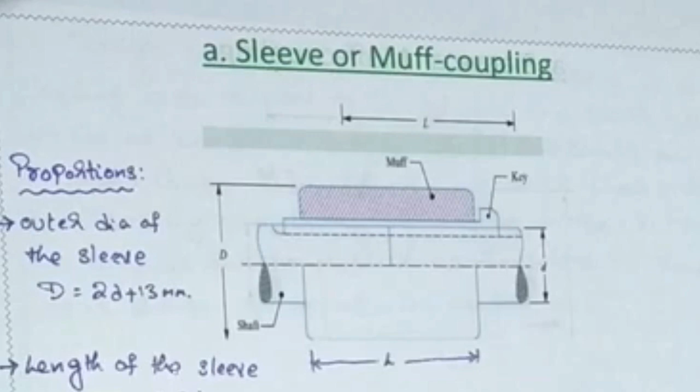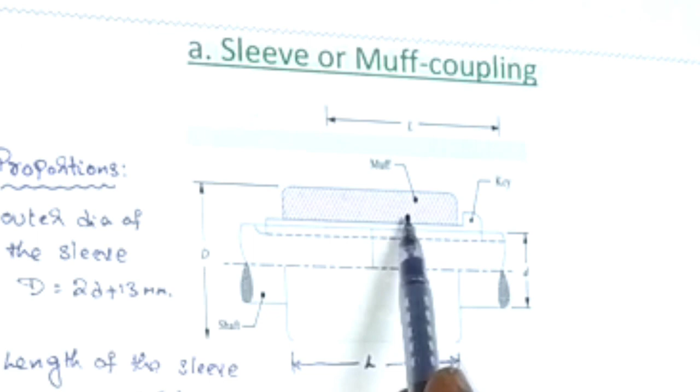Hello everyone. Today I would like to discuss sleeve or muff coupling. Here this is the diagram of sleeve, this is called muff or sleeve. In this, major two parts are there: first is the design part, second is the verification part.

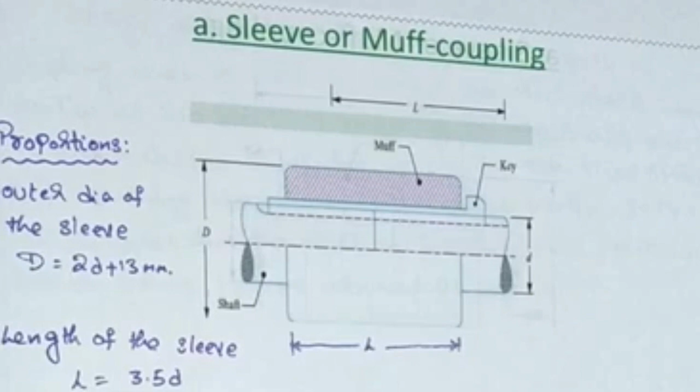In design part we have to design shaft, sleeve and key. After design part is over, we have to check the stresses induced in the key is less than or equal to given allowable stresses. If the values are less than or equal to the given values, the key design is safe. The sleeve coupling is the simplest type of rigid coupling made up of cast iron.

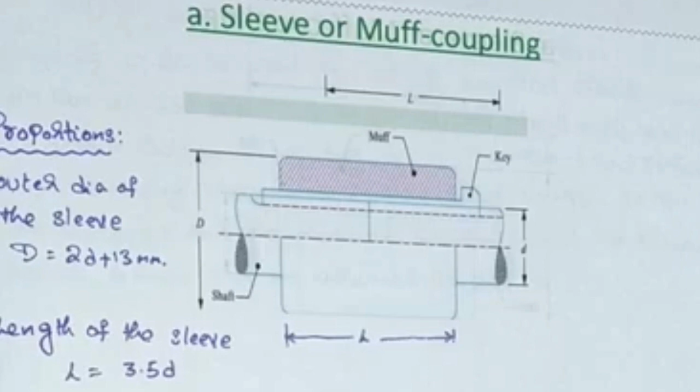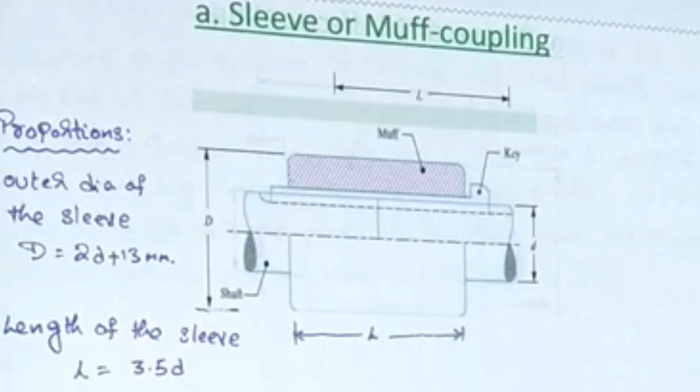It consists of a hollow cylinder whose internal diameter is same as that of the shaft. Here these are the proportions. The outer diameter, from here to here, capital D is equal to 2d plus 13. The length of the sleeve, here this is the length, L is equal to 3.5d.

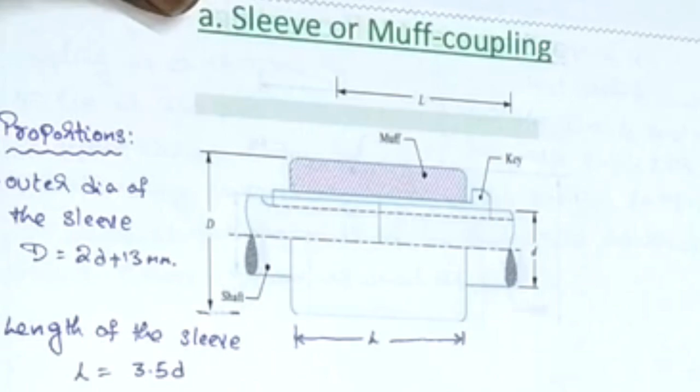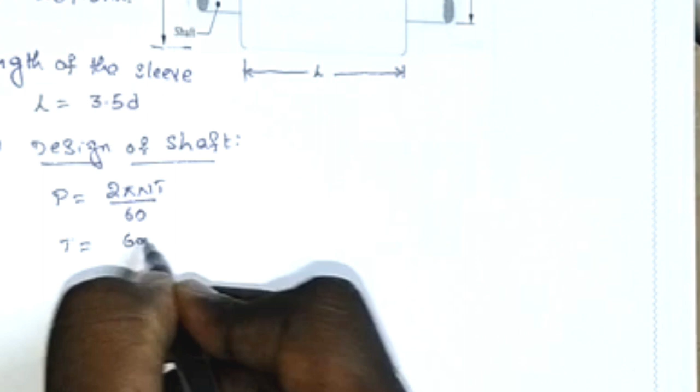First we have to design the shaft. We know the power equation, P is equal to 2 pi NT by 60. From this equation we have to calculate the torque, 60 into P by 2 pi N.

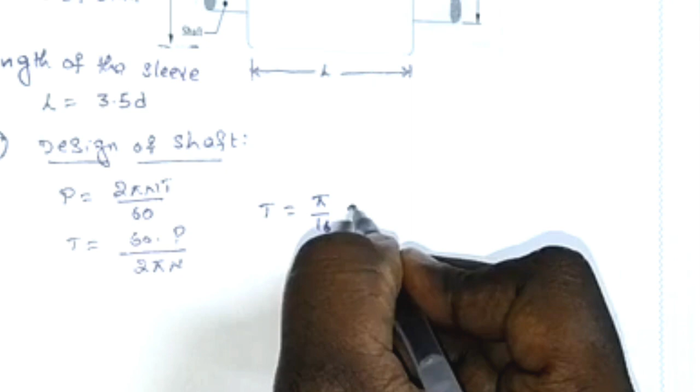And we know the equation of the torque transmitted by a solid circular shaft, T is equal to pi by 16 tau d cube. Here D is the diameter of the shaft. From this equation we are finding the torque value.

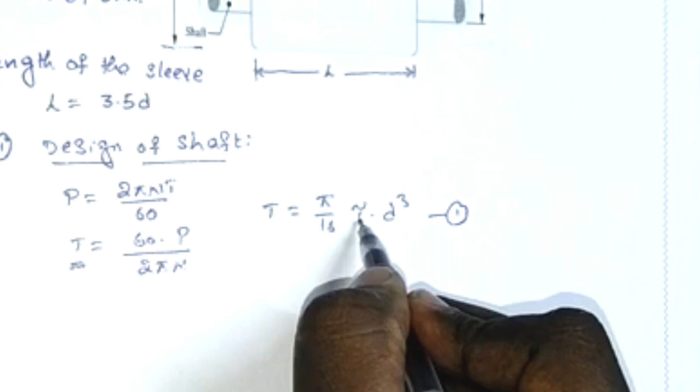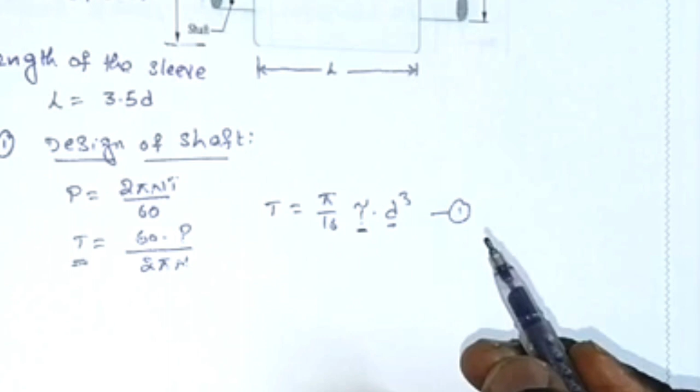After getting torque value, substitute in this equation, we have to find either tau or D. While calculating the problems, tau is given, we have to find diameter, or diameter is given, we have to find the tau. This is the procedure for design of shaft. Coming to design of sleeve.

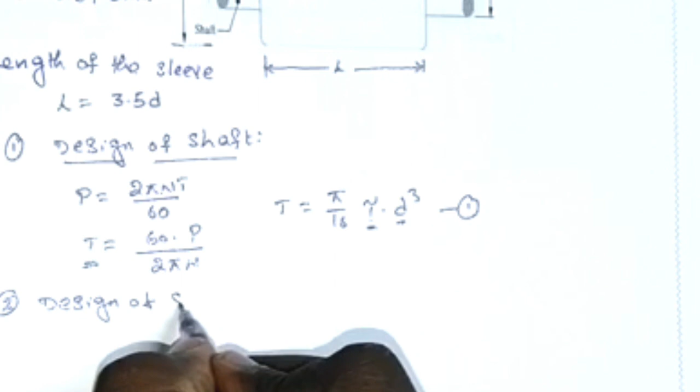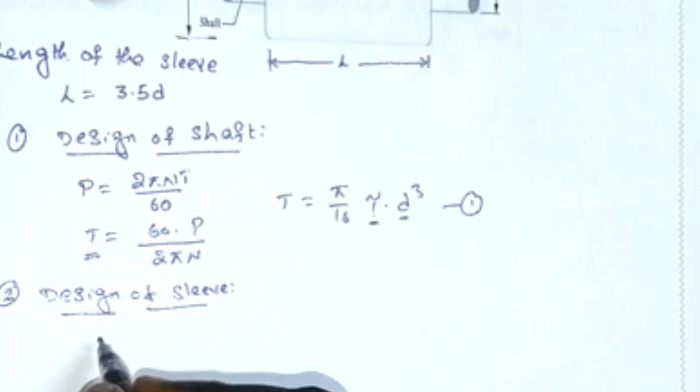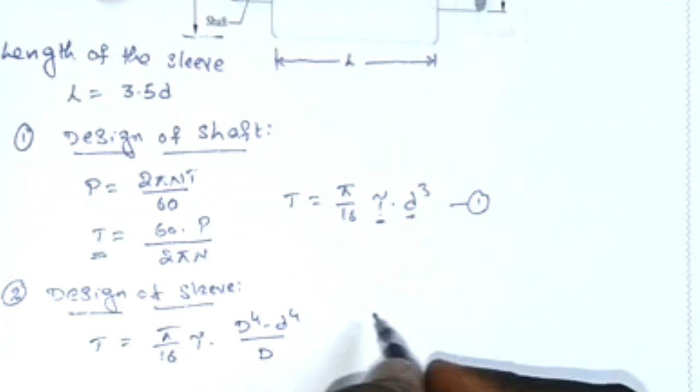Design of sleeve: here the sleeve is assumed as hollow circular shaft. We know the torque equation for hollow circular shaft is pi by 16 tau, capital D power 4 minus small d power 4 by capital D. This equation can be written in some textbooks as pi by 16 tau capital D cube into 1 minus k power 4. Here k is the ratio of small d by capital D.

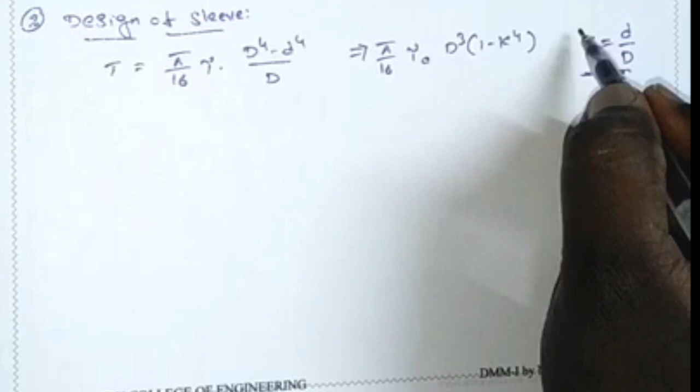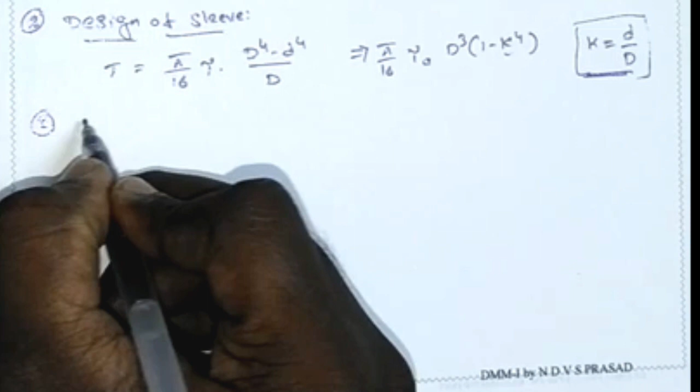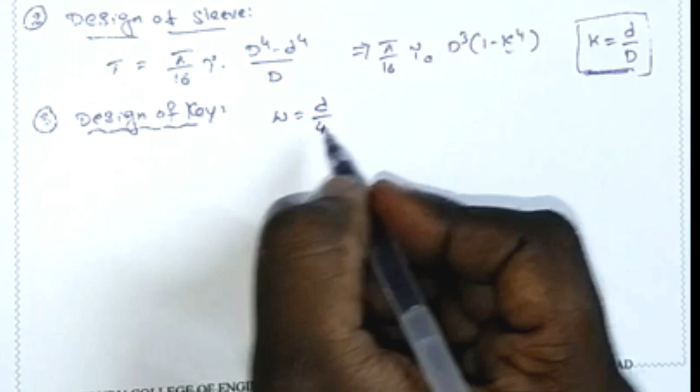In problem, sometimes the k value is directly given, we simply substitute the value. Next, design of key, third one is the design of key. The design of key by simply taking the proportions: suppose width is equal to d by 4, thickness is equal to d by 6, and L is equal to capital L by 2, which is nothing but 3.5d by 2.

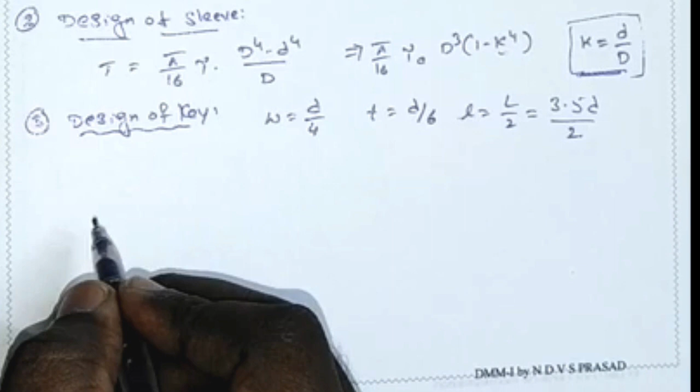By using these proportions, we are finding the key design. From here, the design part is over. Next, verification part. Verification part is basically two types: one is for shearing, second one is for crushing. So check for shearing.

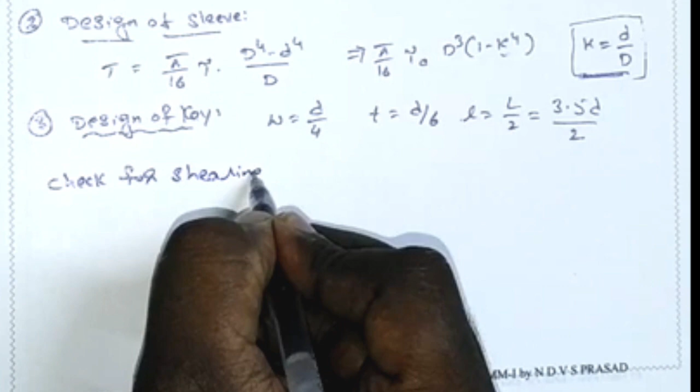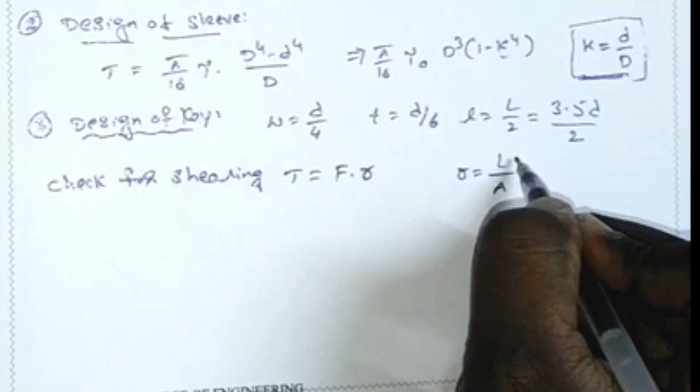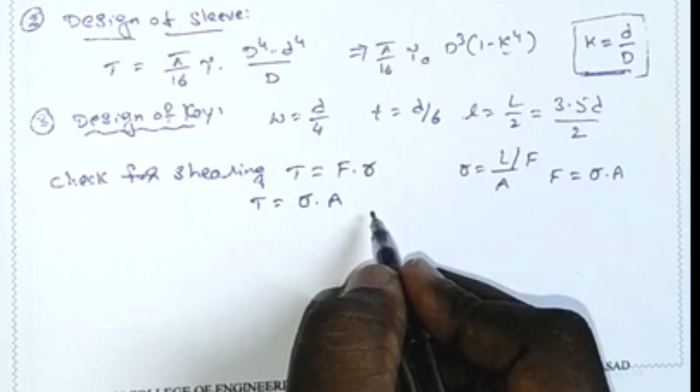Check for shearing. Generally, the torque equation is equal to force into radius. We know the equation stress equal to load by area, or force. From this, we get force is equal to stress into area. P equal to stress into area. Here, stress is called the shear stress.

Coming to area, the key element is here, the cross section like this. This is width and this is the length of the key. So this area will be affected while shearing. What about the area here? W into L. Coming to R, that is d by 2. So tau W L d by 2, so torque.

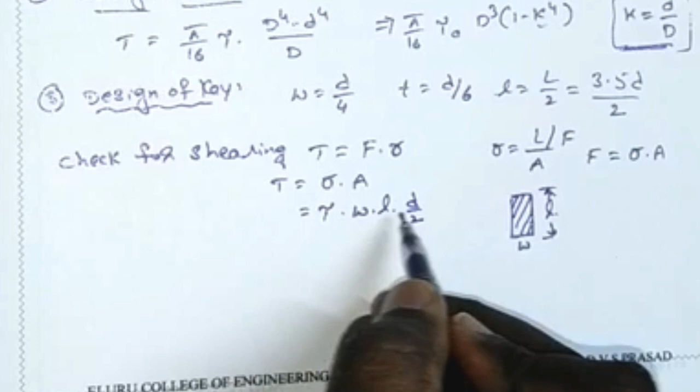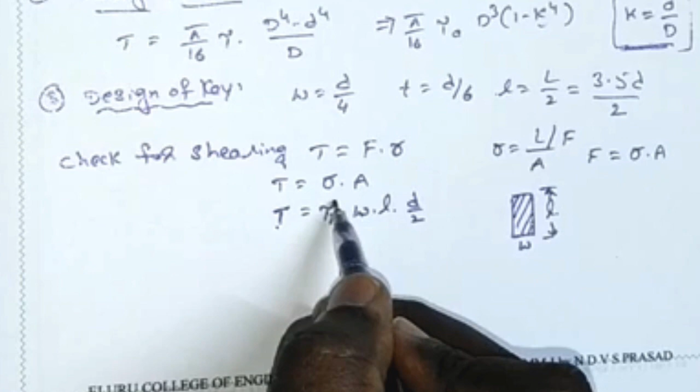Here the torque value, previously found in equation 1, substitute the value. We have to calculate tau and substitute W value, L value, D by 2 value. Here the tau value is less than or equal to the safe permissible or allowable stress given in the problem.

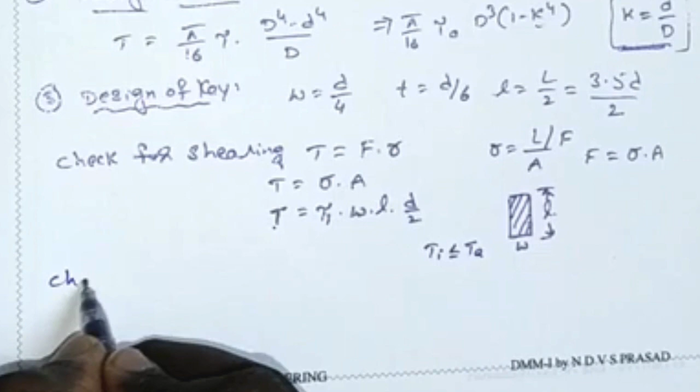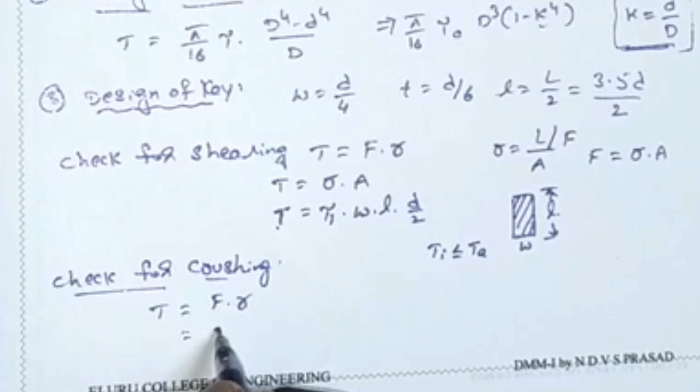Next, check for crushing. Here also torque is equal to force into radius. Force equal to stress into area, crushing stress into area into R.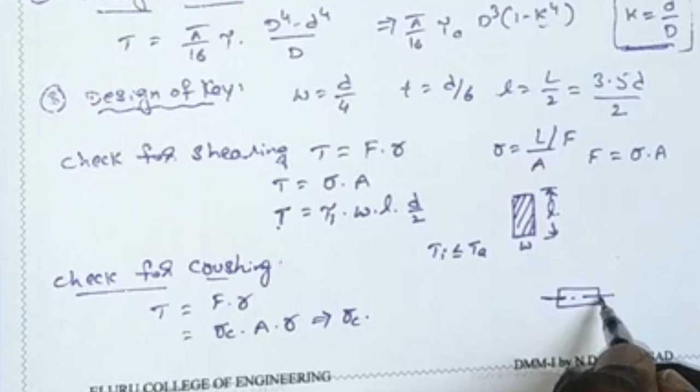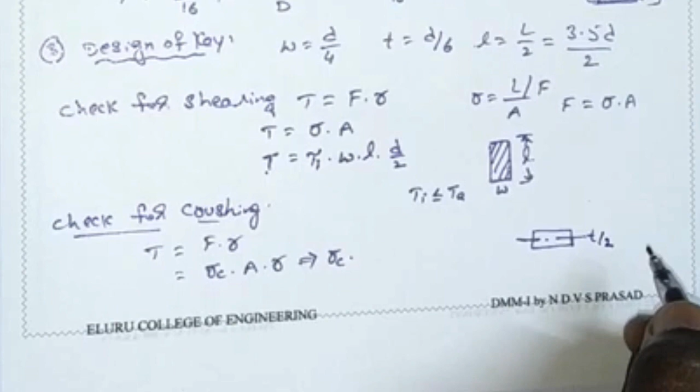Coming to area. Here, the shaft's crushing area allowable, or the crushing area subjected to load, is half of the portion only. Here this is the half. Total value is thickness, but in half portion only the crushing area develops, that is T by 2 over a length of L. So what about the area? T by 2, L. Again R is equal to D by 2.

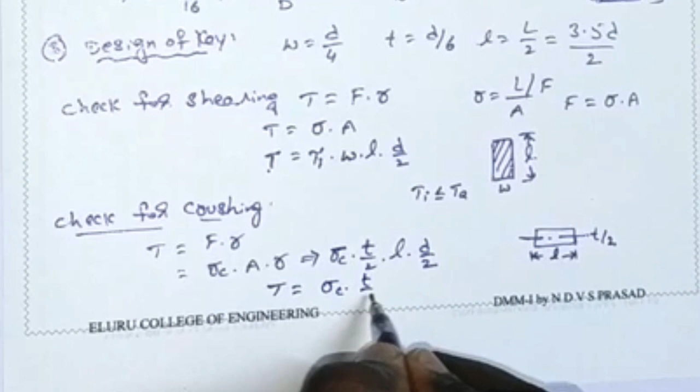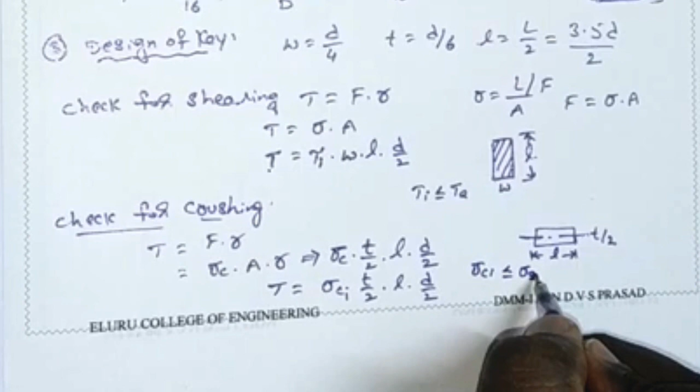Here this is the sigma C. So finally T is equal to sigma C, T by 2, L, D by 2. Here also substitute torque value, thickness, L, D values. You have to find sigma Ci. Sigma Ci is less than or equal to sigma Cs, where s is the safe permissible stress given in the problem.

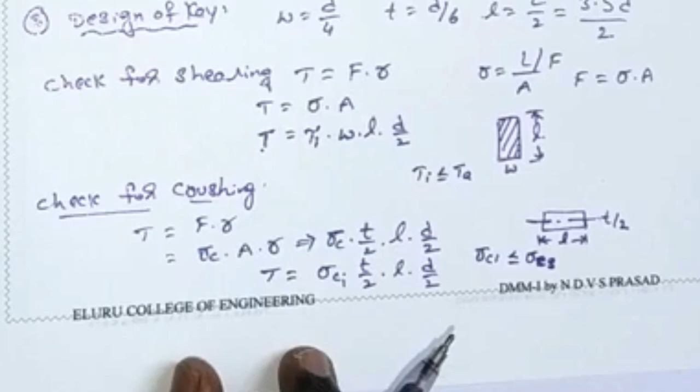Okay, so let us solve one example problem. Here this is the problem given: design and make a neat dimension sketch of a muff coupling which is used to connect two steel shafts transmitting 40 kilowatt at 350 rpm. The material for the shafts and key is plain carbon steel, for which allowable shear stress and crushing stress may be taken as 40 megapascal and 80 megapascal respectively. The material for the muff is cast iron, for which the allowable shear stress may be assumed as 15 megapascal. Okay, first you have to write the given data.

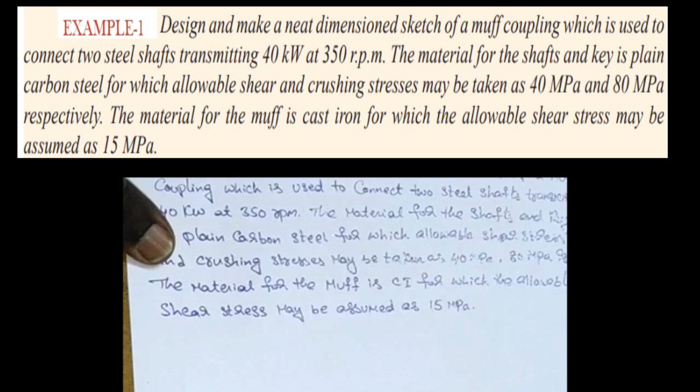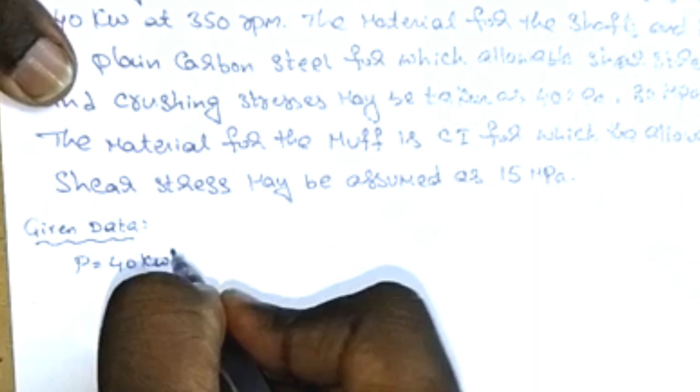Here power is given as 40 kilowatt. We have to convert into watts: 40 into 10 cube watts. Speed is given as 350 rpm.

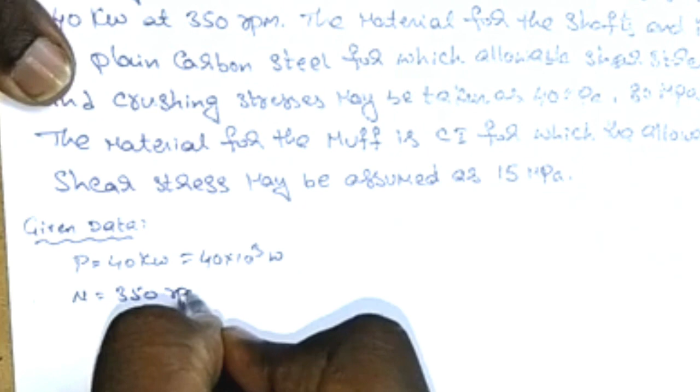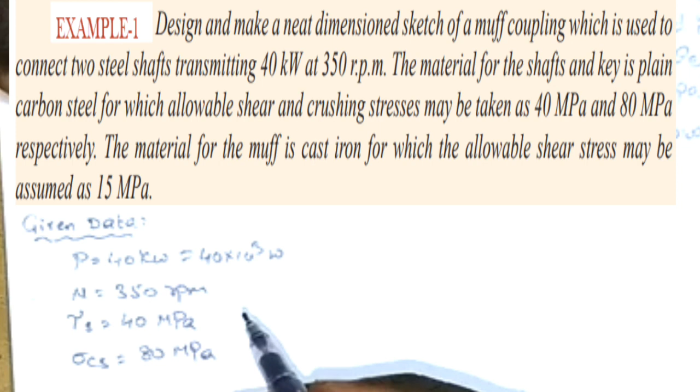Stresses are given. Shear stress 40, crushing stress 80 megapascal. We have to convert into Newton per mm square. 1 megapascal is equal to 10 to the power of 6, and 1 pascal is 1 Newton per meter square.

You have to convert into meters. 1 meter equal to 1000 mm, so 10 cube square gives 10 to the power of 6. So directly 40 Newton per mm square, similarly 80 Newton per mm square here.

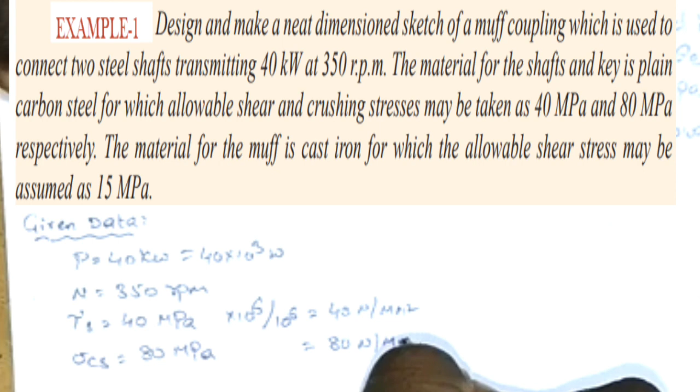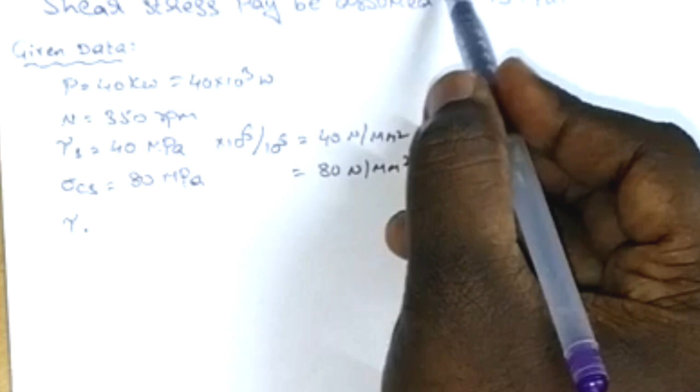And next, the muff cast iron, which is the allowable shear stress of the muff material, is given as 15 megapascal. This is also 15 Newton per mm square.

So first we have to design the shaft. Design for shaft.

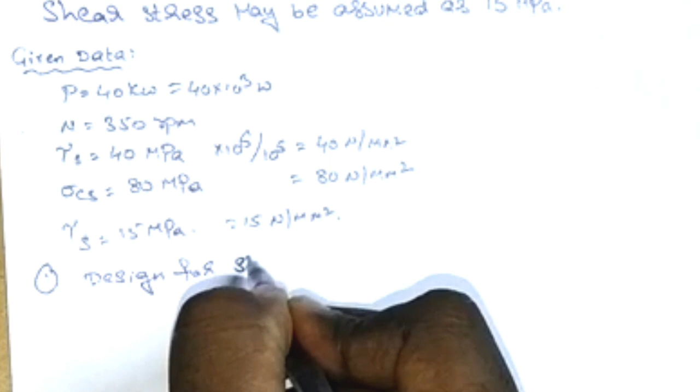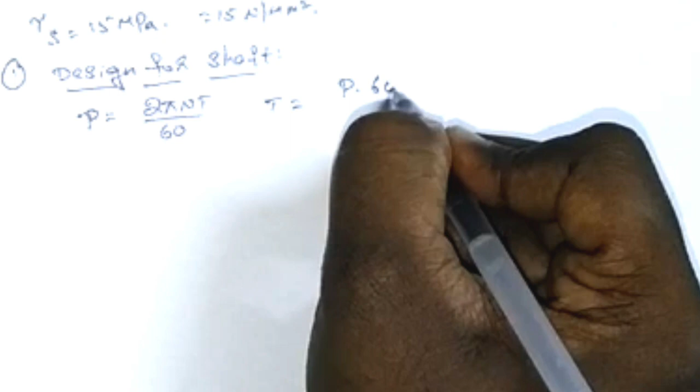We know the torque equation: Power is equal to 2 pi n T by 60. From this equation, we have to calculate the torque: T equals P into 60 by 2 pi n. Power value 40 kilowatt is given, into 60, by 2 into pi into speed 350 rpm. By calculating this, we get...

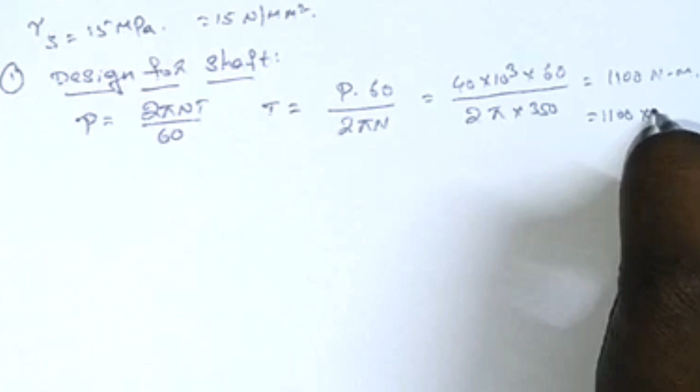...1100 Newton meters. We have to convert into mm: 1100 into 10 cube Newton mm.

By using this equation, we have to find the diameter of the shaft. T is equal to pi by 16 tau s into d cube. This is the torque transmitted for the solid shaft. Here the torque value is 1100 into 10 cube, equal to pi by 16 tau s...

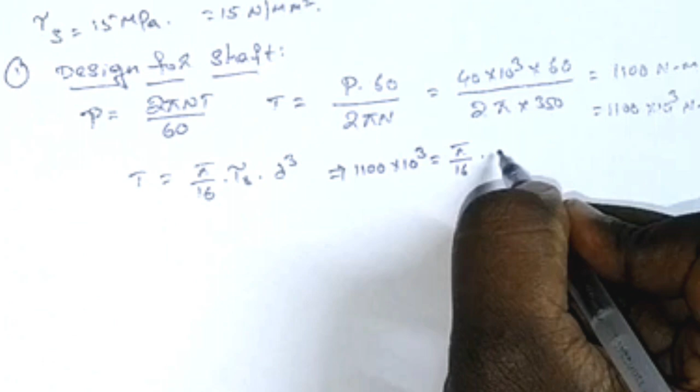Here tau s is 40 Newton per mm square, 40 into d cube. By using this equation, you have to calculate the diameter value. D is equal to 52, rounded to 55 mm. Second one is the design for sleeve.

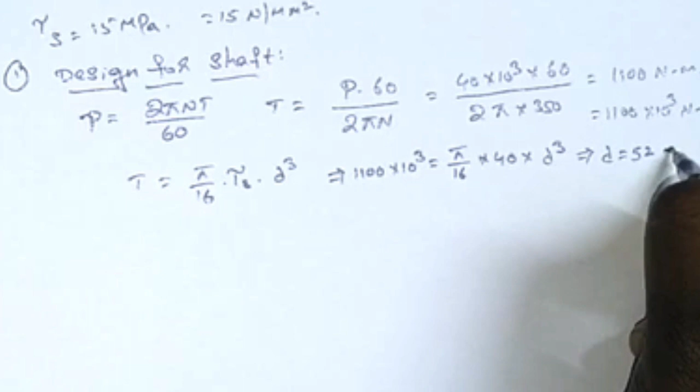Design for sleeve. Here, while deriving the equation, we are having the proportions: Capital D is equal to 2d plus 13.

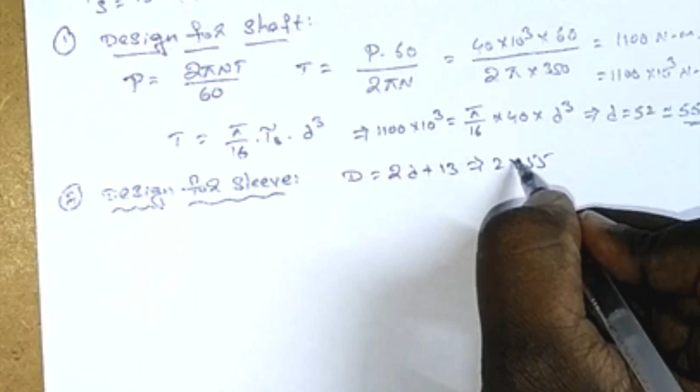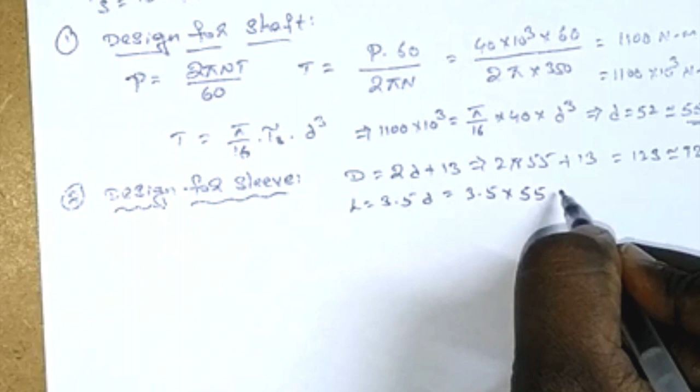2 into diameter just now calculated, 55 mm, plus 13, is equal to 123, rounded to 125 mm. L is equal to 3.5d, equal to 3.5 into 55, equal to 192.5, rounded to 195 mm.

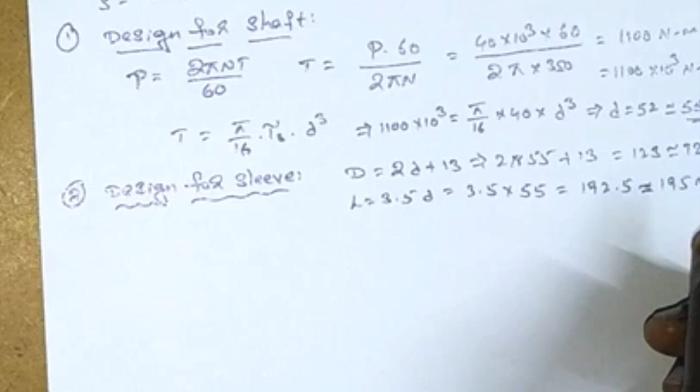Here we have to check the induced stress in the muff. What is the equation here? Torque transmitted by hollow shaft - here the sleeve is assumed as a hollow circular shaft: pi by 16 tau c into (D power 4 minus d power 4) by D.

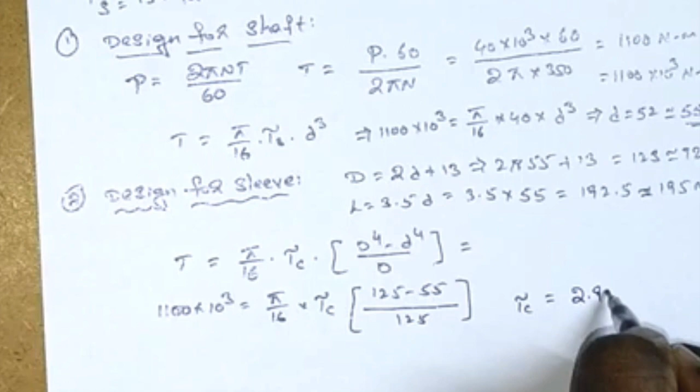Here the torque value is 1100 into 10 cube, equal to pi by 16 into tau c, with capital D 125, small d 55, by 125. So from this equation, you have to solve tau c is 2.97 Newton per mm square. Here the allowable value given is 15, so this value is less than 15. The design of sleeve is safe.

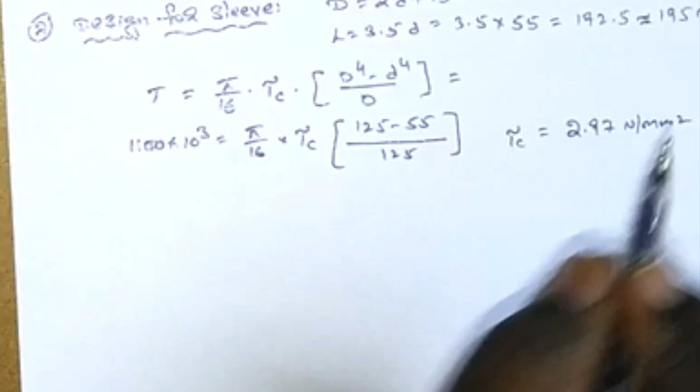Next, design for key. According to the standard tables, with respect to the diameter of the shaft, the key values can be taken.

W is equal to 18 mm. Here we are having one equation: the crushing stress is double the shearing stress. So by using these values, assumed as a square key, thickness is equal to width is equal to 18 mm. L is equal to capital L by 2.

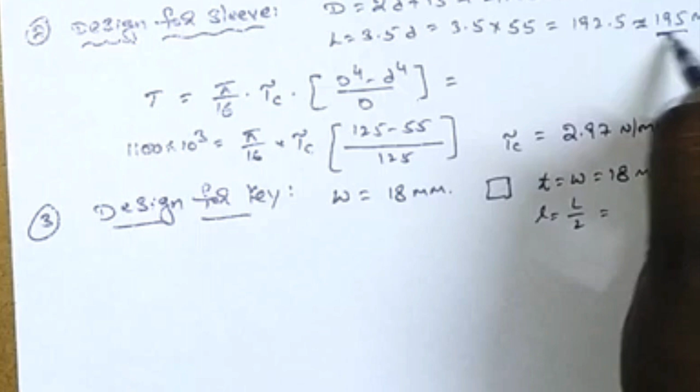So capital L is 195. 195 by 2 is around 97.5 mm. So from here the design part is over.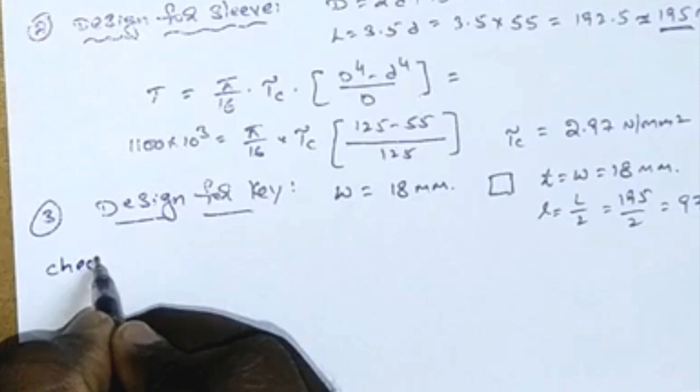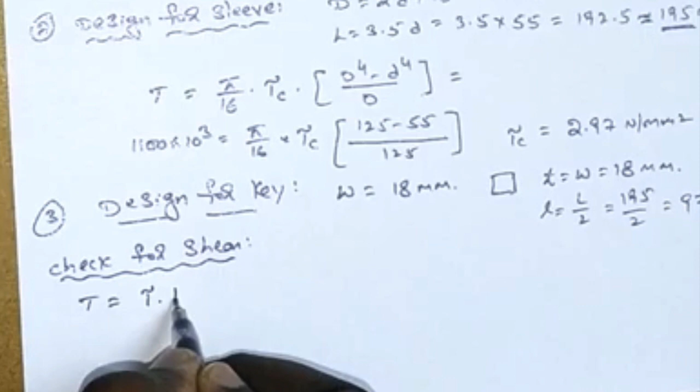Now the verification part. First, check for shearing. The equation is: torque is equal to tau into W into L into D by 2. Previously we calculated the torque value, W, L and diameter value.

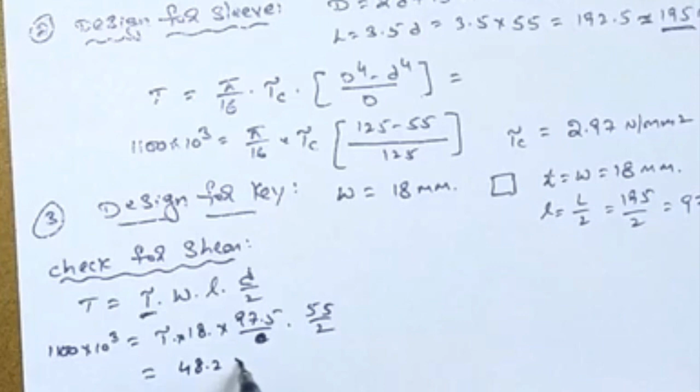Substitute here to check for the shear. Torque value 1100 into 10 cube is equal to tau into W 18, L 97.5 by 2 into D, L 97.5, D 55 by 2. By calculating this equation, around 48.2 into 10 cube tau s.

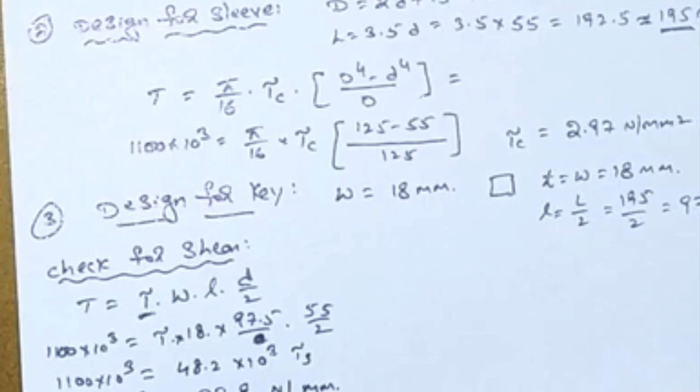The tau s value is 22.8 Newton per mm square. Here what is the given value? 40 megapascal, which is 40 Newton per mm square. So shearing is safe.

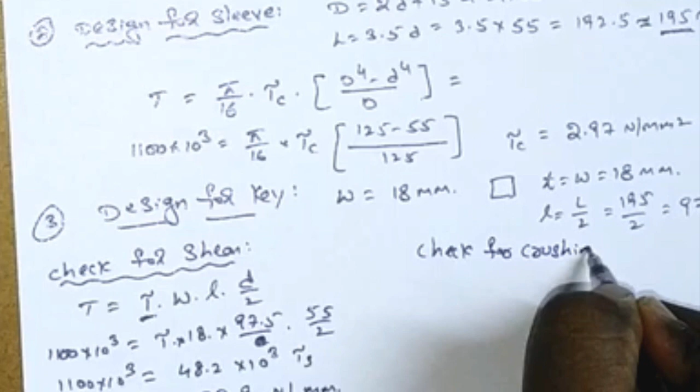Check for crushing. What is the equation we are having? T equal to sigma c into T by 2 into L into D by 2. Check the crushing value: here T is 18 by 2, L is 97.5, D is 55 by 2. By solving this equation, we get...

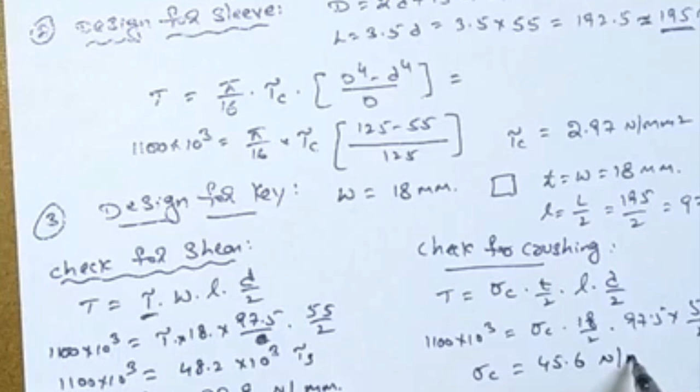...45.6 Newton per mm square. The given value is 80. So crushing is also safe. This is the procedure for calculating sleeve or muff coupling design and problems.